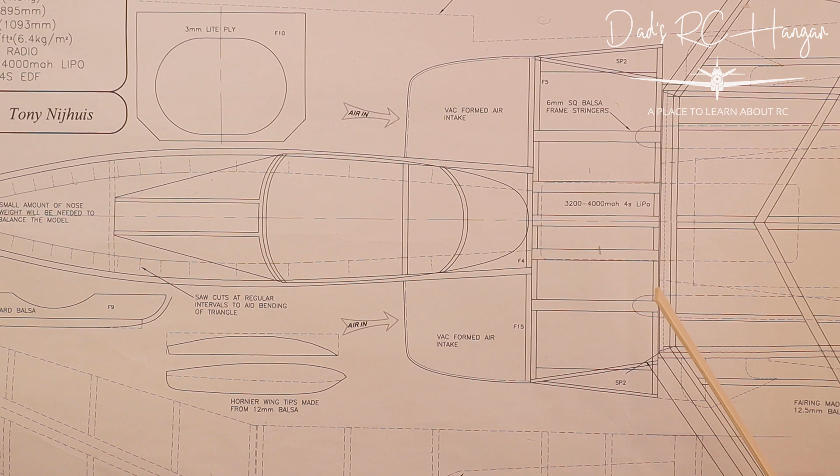Oh yes, back from the interlude. No, this is an interlude. What is an interlude anyway? I don't know. But anyway, this is the canopy.

So this is the gluing - you can't really see it, but it's over there. There we go, hang on, it's over there. So that's had its first bit of sheeting put on, and I use white glue, so it takes a little while. I know I should just use CA for everything, but anyway.

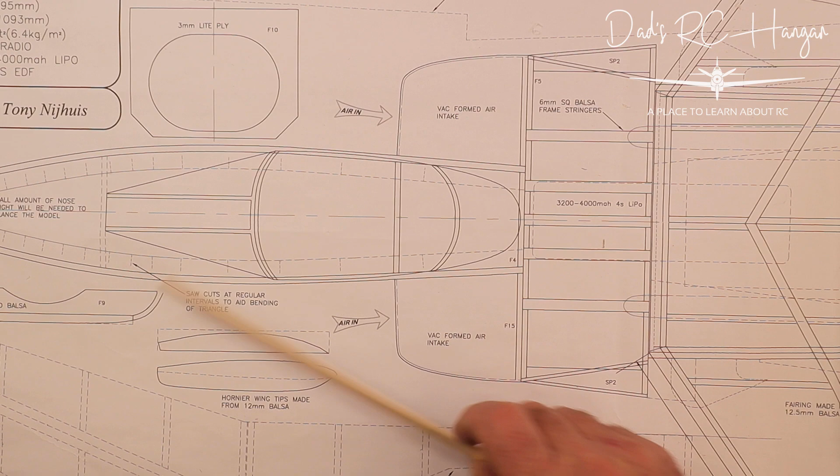So as you can see, this is the top of the front fuselage, I like to call it the nose, and this is the canopy. Now note, when we tried to fit this, it was all a bit of fun and games.

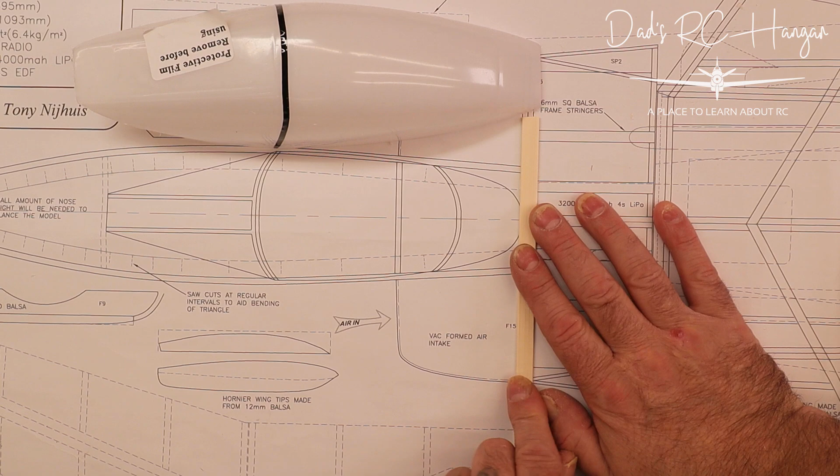So what I've done is put a black line across the centerpiece, which goes there. And you can see, if I put the line at the back - using this edge here that we're looking at - if I put the line across there, you can see this needs to be cut down further. In fact, you can't even see properly. Let's just bring this forward without dropping the wing on the floor. So I haven't cut it down correctly.

Now I got fooled by these shapes and bits and pieces. I don't think that is that, because if that was that, it would be there. So I'm just going to have to make my own kind of pattern up, I guess.

And now you see this window here is quite prominent, and I don't think you can see it there. Oh, you can see it, there you go - see that edge there? Is that there? So if I go over the top of it and put it there, it's too far forward. Interesting.

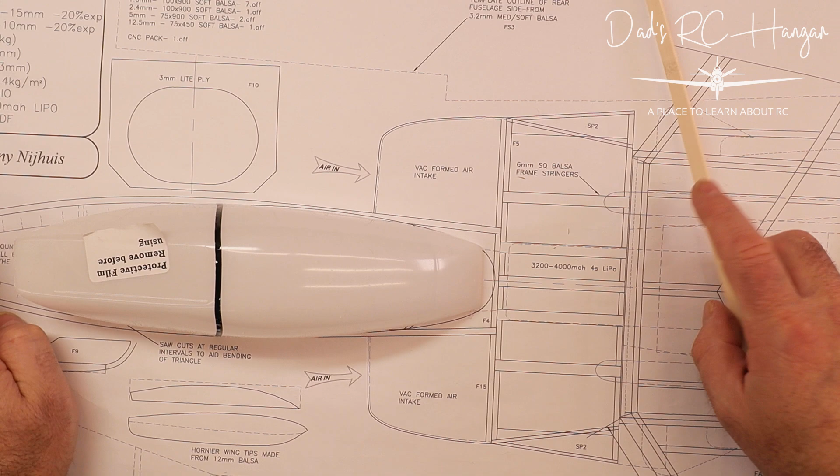So I think I've got to do a bit of random cutting here. And it's the same with the side as well - I thought this edge here, which you can just about see in the light, was the canopy edge, that would be painted, this would be painted in the middle, like the actual image of the finished jet.

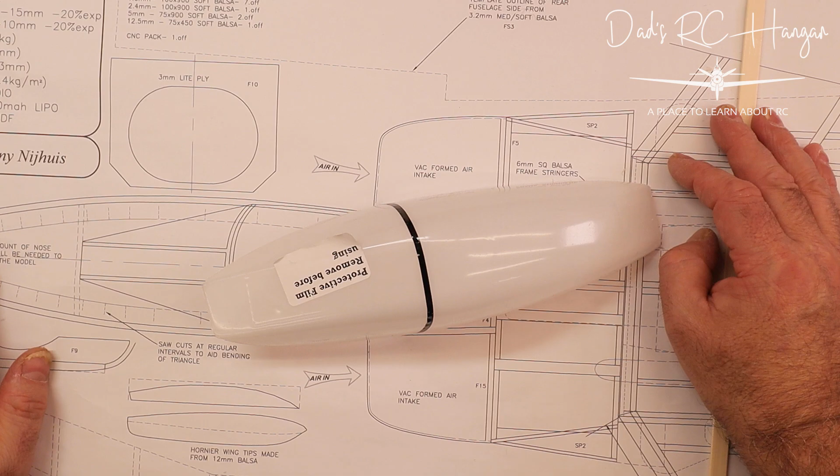And it's the same with the side canopy. In fact, while we're doing canopies, let's have a look at the side while that's drying. And if by magic, the side - so when I put my canopy, that's it, I just had to move the wing. There's a cut there, I do hate it when I cut the actual planes. So using this black line here, you can see that this does reach the back.

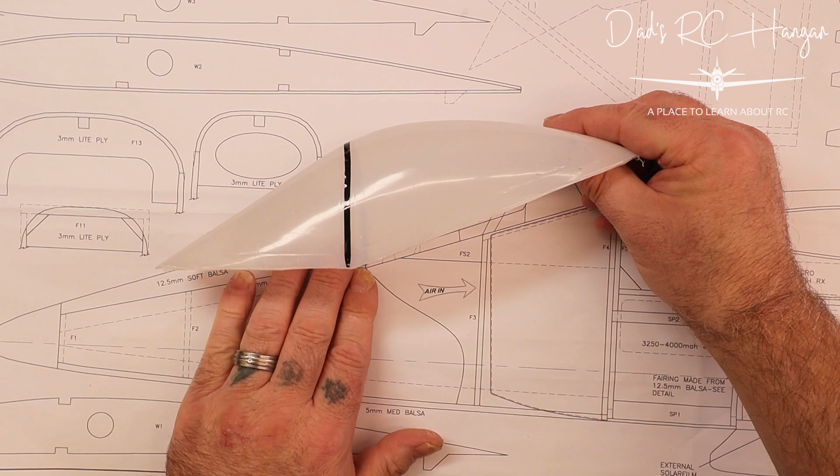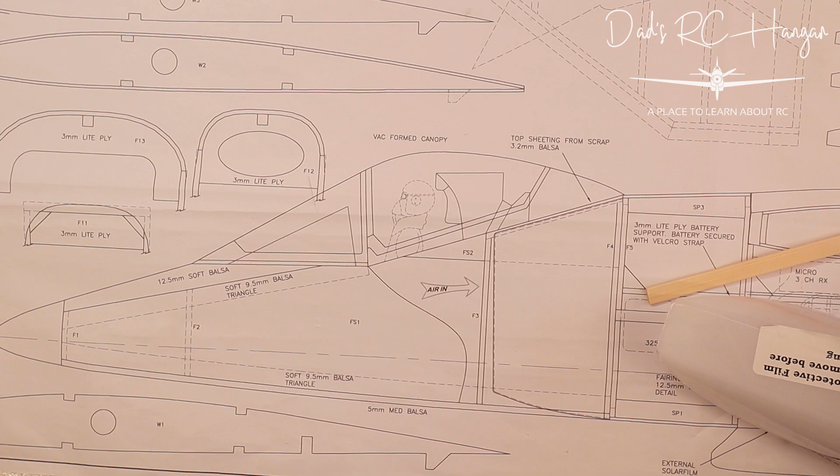Interesting, huh? That does reach the back there, and it's just the front that needs cutting down, which would be by that window, I would have thought. So really, even this piece here doesn't suit this, because if I put that edge on the bottom, you should be able to see this edge here, that edge there - you can see there's quite a gap. And if I put the edge back here, it's a gap at the front. So I think this side image actually looks different from the top image, because if that's lined up there, I think it's just an optical thing.

If that's lined up there, then the end, if I line that up there, you can just see under there. So we're probably looking about just below there. But if I show you, because I can flip it around - to there, sorry. If I put a bit of tape, let me get out my tape. I'm going to cut that round, so that's there. So that is right then. I think it's just an optical illusion.

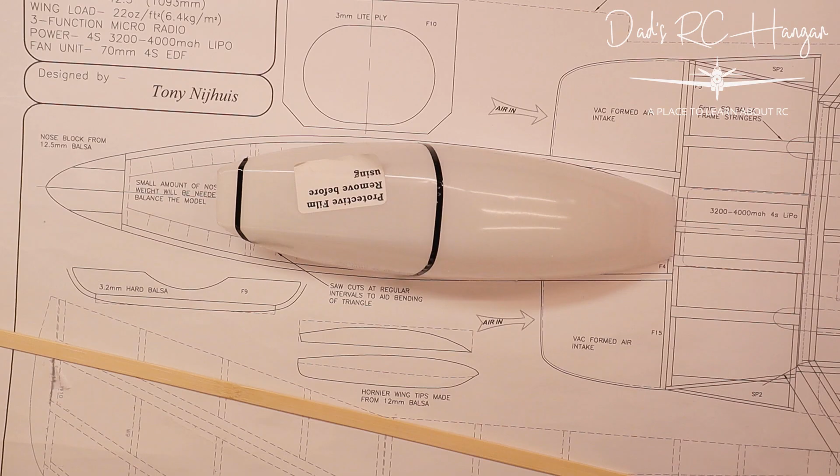So that needs, from what I can see, cutting at the front. So the front needs cutting. Maybe I've got to cut it all the way up here as well then. But that comes round to here, and no way does that - it's just the back edge. So yeah, I'm really stumped on this. Also, what I forgot to tell you is why you're all sort of simmering about that, and hopefully you'll be able to tell me in comments what's going wrong.

If I bring the wing over - I can do it in tape now so much, but I've still got my weights on here a minute. It's probably dry now anyway, but I'll just stick them on here. What I forgot to tell you is that I also had to sand down the leading edge as well, because that was just one piece of balsa, same width. And also, if you noticed, I did forget to tell you that I cut the tags off. These had little standoffs to get the wing form on top. Well, once you cut these off, I just cut them off with a blade and sand it down. But yeah, give that 5 minutes and I'm ready for the next section.

But interesting about the canopy, huh?

Okay, just before I put the next sheeting on, I just thought of this - I nearly glued it, I nearly forgot, so I've got the next sheeting on there. I'm going to have to go a bit different as well - full-blown sheeting here, just so I get the hatch correct. Which means it's going to end up with a small piece here, which I'm not too worried about, but hey-ho.